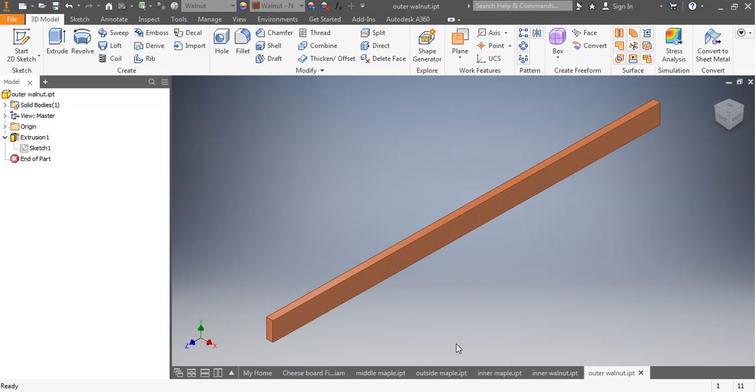This is part 2 using Autodesk Inventor to draw a cheese platter. So what we've done so far is created all the different pieces needed to actually make this cheese platter. Now I'm going to assemble them to resemble this.

The first thing I'm going to do is come up to the top and go to Assembly, then Place. In Place, I have to go back up and find where I did this, under Grade 9 and Cheese Platter. I'm going to use the inner maple piece as our very first piece - that's inner maple, outside walnut, middle maple, I should say. Click on open, and we'll put our first piece in.

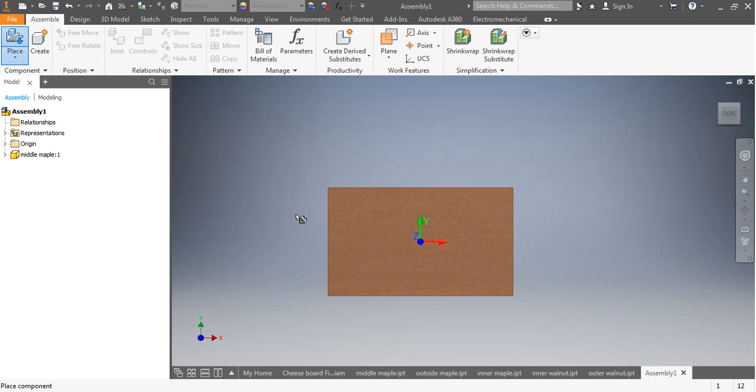Then I'm going to place our inner maple, and there's another piece there - I'll scroll out a tiny bit, right mouse click OK, and place again for our inner walnut. I'm just going to repeat this until I get all my pieces in place, then place our outer walnut, and place our outside maple, and that should be our 5 pieces.

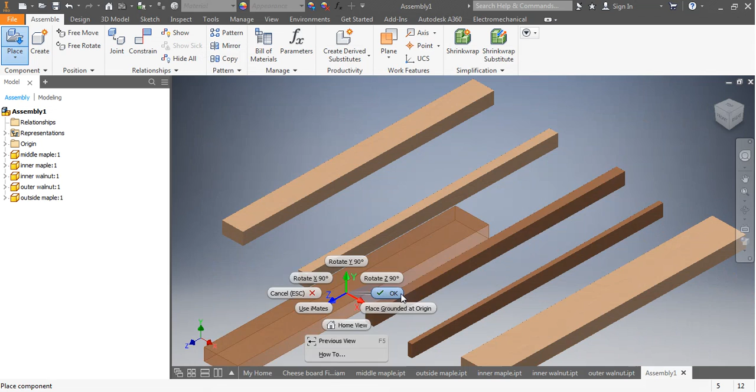All right, so time to assemble these. If I look at this, it goes the wider piece, which is the middle piece, and then it goes black walnut maple, black walnut maple.

So back to our assembly. The first thing I do is- whoops, I shouldn't have done that, let's go back to assembly. So this is our first piece, and you can see I can move it around, but I want everything to move or revolve around this piece. So I'm going to right mouse click over the middle maple and go 'grounded.' When I go over top you can see a little pin there, and it's grounded. What grounded does is it doesn't let me move things, and you can see all these other things can move relative to it.

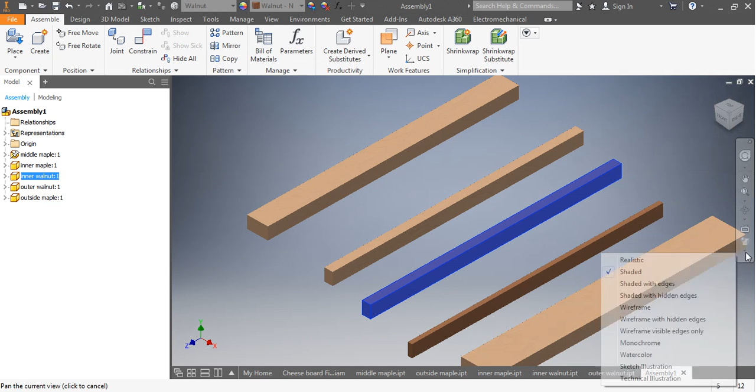The other thing I'm going to do is go to visual styling - undo it so you can see, because yours probably doesn't have it on. Go to visual style, then shaded with edges, because I just like seeing the edges a bit better. All right, so here we go - this piece is going to end up there, that piece there, that's the order I want them to go in.

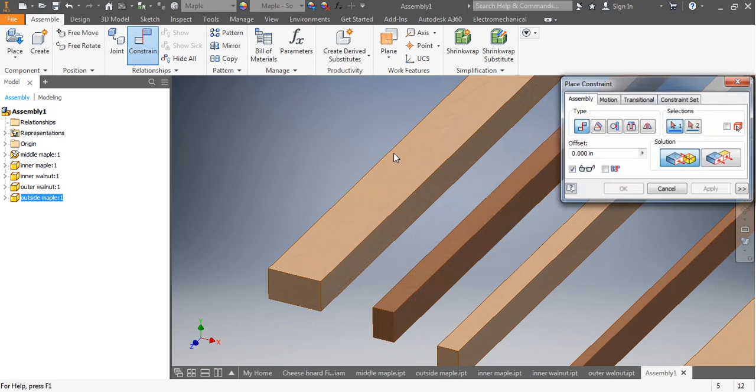To start off, I'm going to go to Constrain. I'm going to constrain this edge here and this edge right here, and you can hear it click together. If you look, you can see from the top they're clicked together, but from the ends they're not. Then I'm going to constrain - oops, I didn't hit apply, let's try that one more time. So from there, rotate - I'm holding my shift key down when I do this, and the center scroll button - click it into place and click apply.

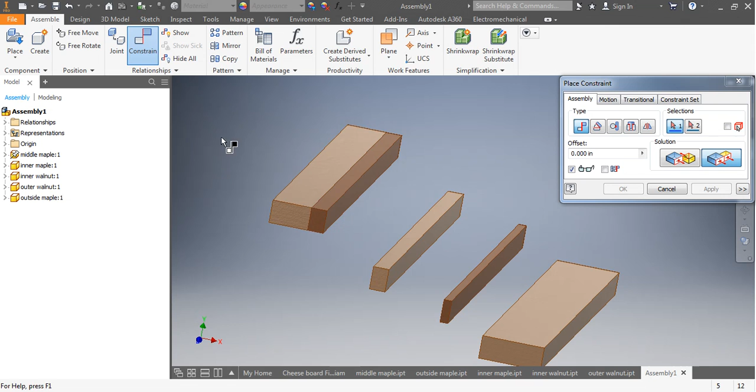Then I'm going to take the top of this one, top of this one. You can see it went to what's called mate - I want them to be flush, so I click over here to flush. Now they're flush, hit apply. I'm going to zoom out a tiny bit, then take this end piece and that end piece, and you can see they pop into place - apply as well. Continuing along, this piece here to this piece here.

They pop together - now you see the faces are flush, but I want them to mate like that, and apply. Tops - again they went to mate, I want them flush, apply. And again, end to end - okay, they pop in place, apply.

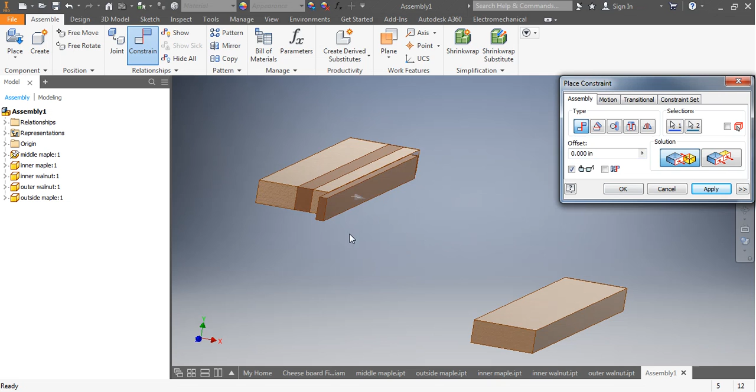Continuing on, that one to this one - let's see, yeah no, they went to mate, so we want flush, sorry, we want mate, not flush, and apply. Up top, top to top - again let's make those ones flush and apply. Then finally, end to end, apply.

And the last one, that one there to that one there - those went to flush, we want them to be mate, apply it. I'm going to do the ends first - it doesn't really matter, that one's the wrong way, we want it flush, apply, and finally top to top, apply.

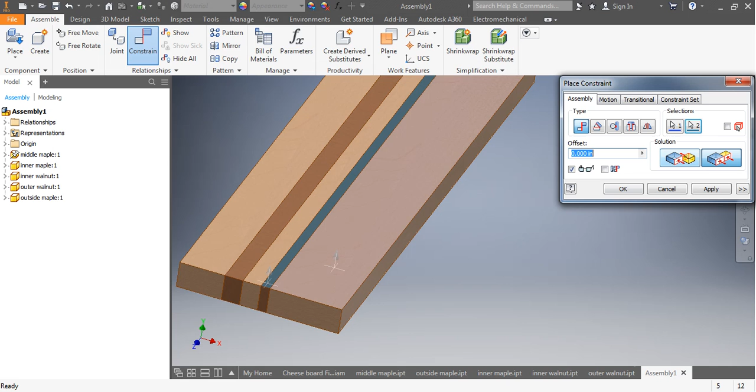Now all that's left here is to actually take these ones and mirror them across - so 1, 2, 3, 4, 5. What we're going to do is cancel this, and I'm going to come here and click on the top one, hold my shift key down, click on the bottom one. You can see they all highlight, right? So I'll do that again.

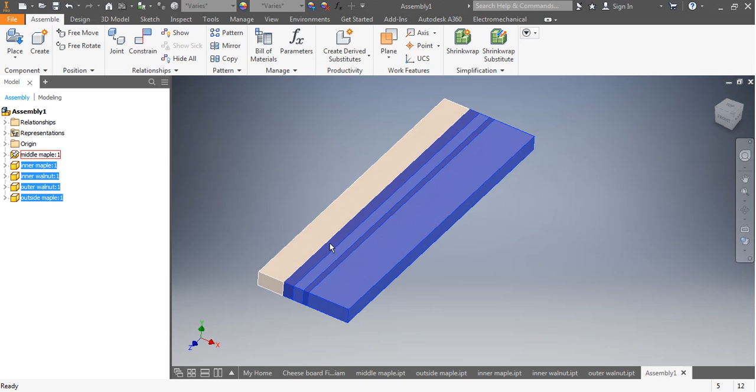Click with the left mouse button, hold the shift key down, click with the left mouse button again - it highlights all those. I'm going to right mouse click and go copy, then right mouse click and paste. That's going to paste all those, and all I'm going to do is repeat one set of constraints to put it all together as a whole piece.

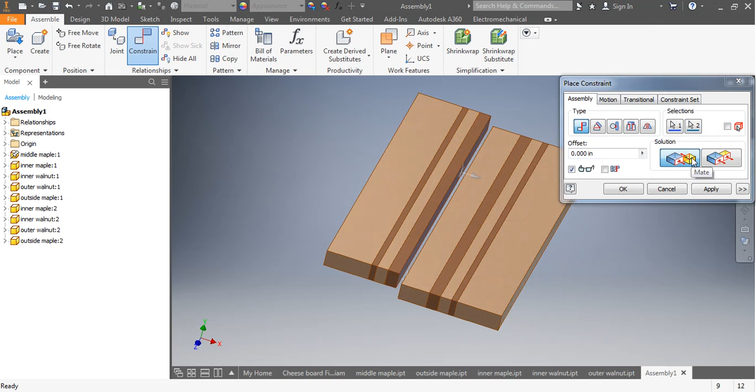So I go Constrain, and this time I want this piece here and that one there - you can see automatically it goes to flush, or sorry, mate, that's what we want, and apply. You can see they're not parallel, so top one to top one - that worked out, let's see - no, those are opposite, so we want them to be flush, and apply. Finally end to end, and apply. So there we go.

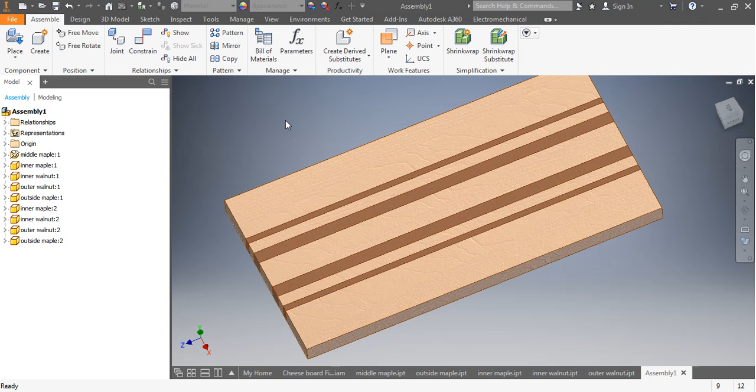We have basically the start of our platter already done - it's all assembled. Now the next step in the next tutorial will be how to add the shape and cut it out. So that completes this tutorial on starting the cheese platter.